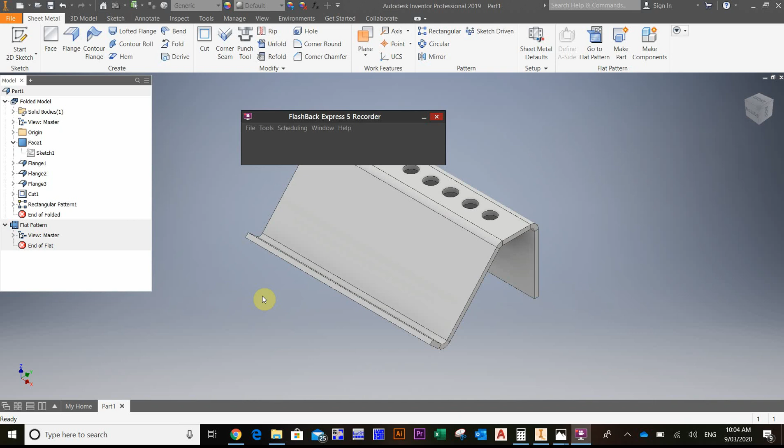Hey guys, I wanted to make a video on the Desk Tidy project that a lot of you are doing for Year 10 graphics. Simple video on how to use sheet metal and how I arrived at this very basic solution for the assignment.

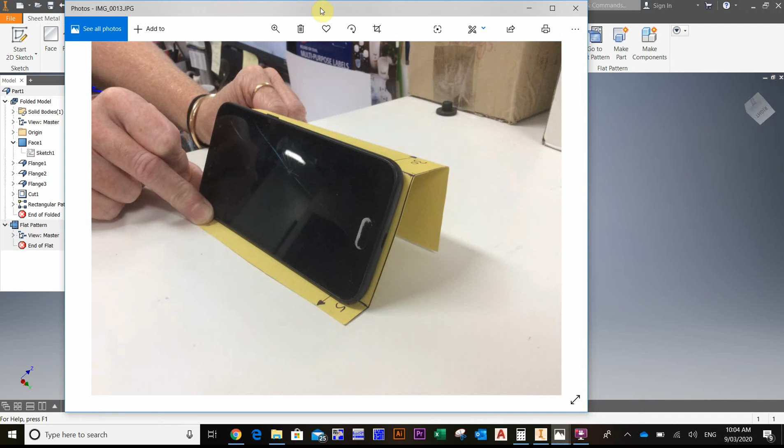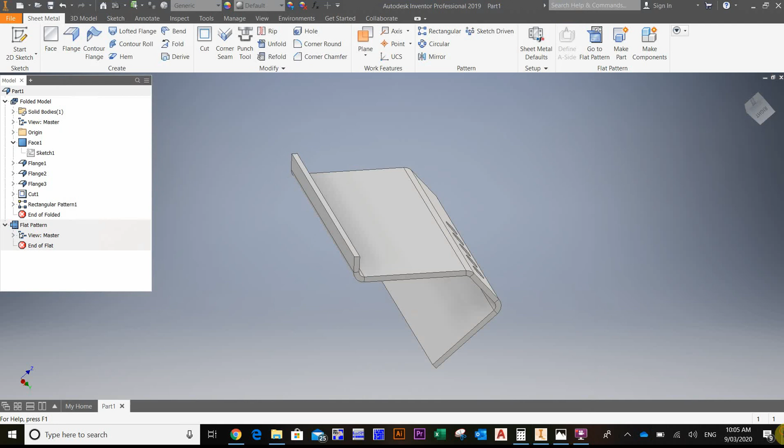What I'll do first is show you a couple of photos that I've taken. You would have worked with your teacher to develop your own cardboard model, so with that you get an idea of if it's going to hold your products and suit your needs. I'm not going to go into great detail about this, this is what your teacher will do with you in class. But what your teacher should have done is got you to draw on top of your development or your net, depending on how they're calling it, and figured out the distance between your fold lines, any angles for your folds, and a width for your sheet.

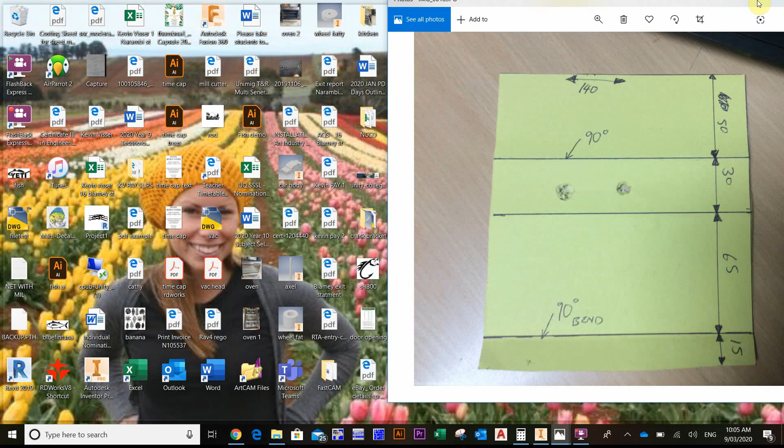We're going to be referring to this image quite a lot throughout the drawing of this, so I'm just going to keep it open here, and I'm going to minimize Inventor just so we can see both at the same time. I'll try something like that, see how that goes.

So what you're going to do is you're going to start a new sheet metal drawing. We want a metric sheet metal drawing, and I'm going to click on that.

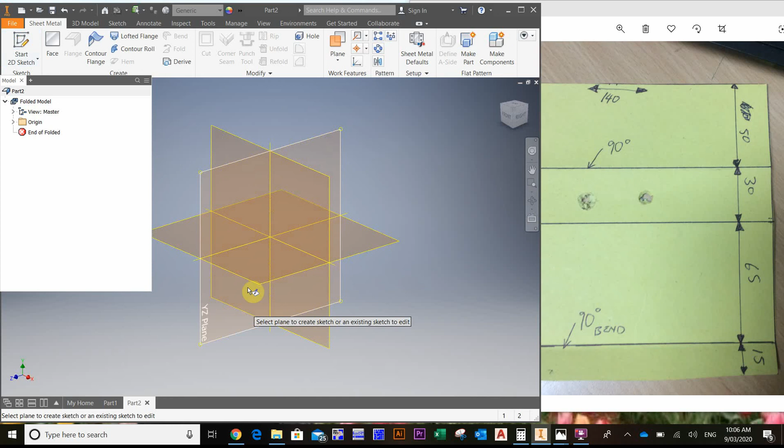Once that's loaded in, just like always, we're going to click the XZ plane there, and I'm going to start by drawing a rectangle. You'll notice with sheet metal it looks a little bit different. Okay, we've still got a sketch. The 3D part won't always work for you in sheet metal, it's a little bit different. We've got some different names for some of the things that we do. But the whole concept of having to do a sketch before you create a solid component is the same.

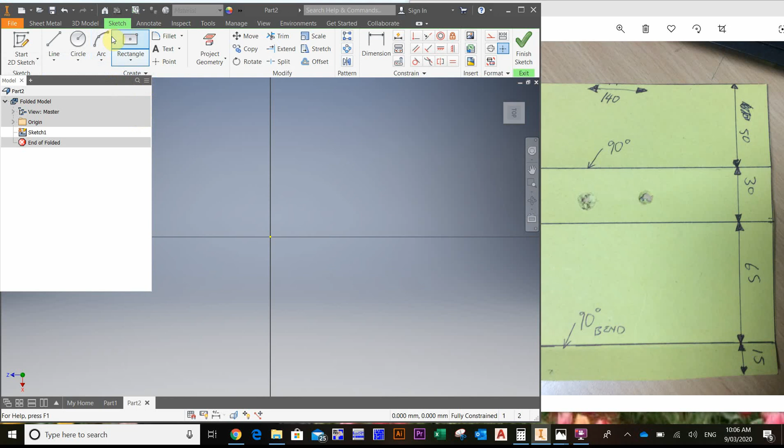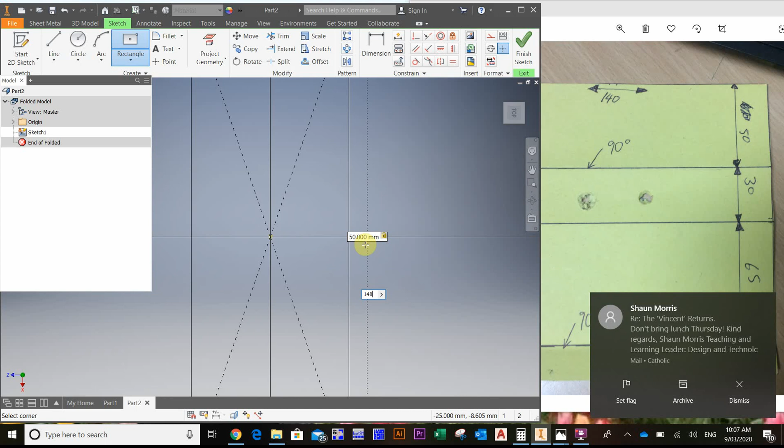So let's start off with a sketch, and I'm going to go to rectangle, and I want a 2-point center, and I'm going to select the center of my drawing like always, and I'm just going to draw this the same way that I'm viewing it over here. At the moment I've got a 140 wide by 50. We'll start with that one. So let's do a 50, and then I'm just pressing tab and 140, and I will press enter.

I'm going to zoom out. So there's my 50 by 140. I'm happy with that, and I'm going to go finish sketch. Sorry, 50 by 140, so I've just drawn that top rectangle there.

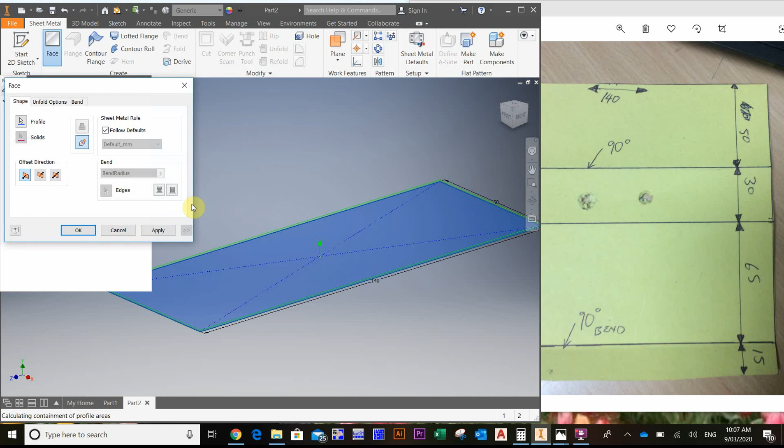The next thing I'm going to do is I'm going to press face. Now this is the equivalent of extrude, if you like, and I'm just going to click OK. What I don't know yet is how much that extruded, so I didn't get to put in any information there. I just was able to click face, I couldn't put in a value for the thickness.

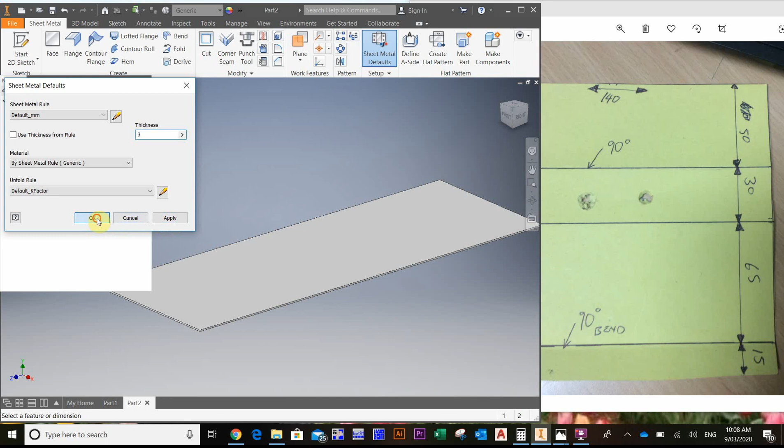But if I double click here on sheet metal defaults, I'm going to deselect use the thickness rule, and I'm just going to whack in 3mm because most of you are using 3mm acrylic, and I'll click OK. You'll notice that it's grown in thickness already, so it's grown to that 3mm in thickness.

So the next part that I'm going to do is I'm going to do a 90-degree bend, and I'm going to travel for 30mm. To do that I'm going to use the flange command. So I click on flange, I select that surface there, and I'm just going to put in my distance of 30mm that I'm getting from here, and there's my 90 degrees. Click OK, and that's done.

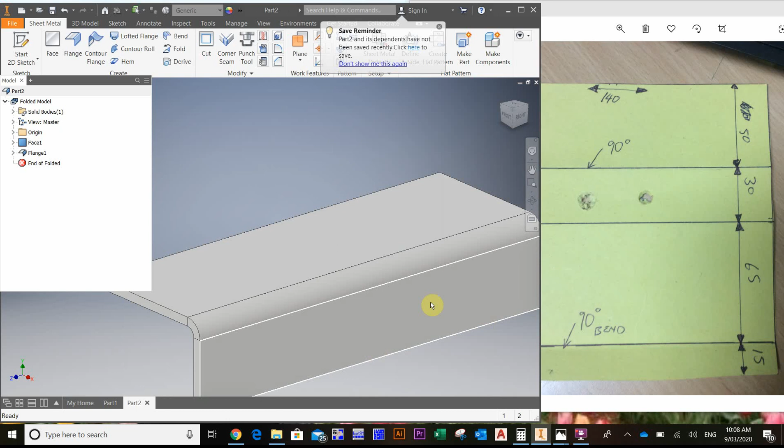So it's starting to take shape. If I take a look and we go back over here, I've just drawn this back panel and the top part there. We now need to come down this way, so I'll come back over to here.

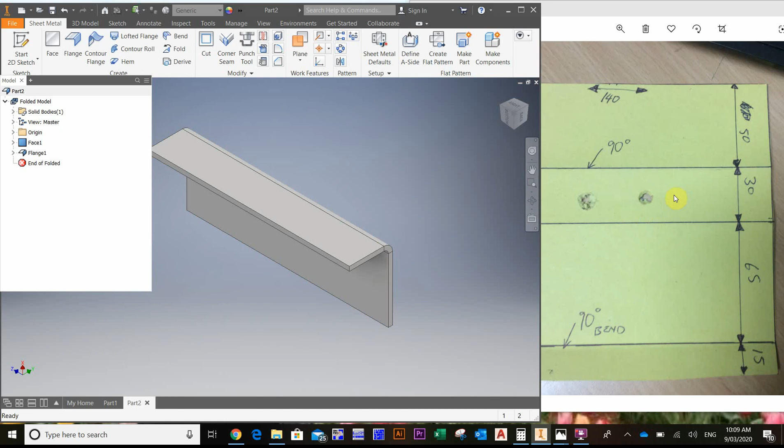So now we're going to travel for 65mm, and I wasn't too sure of that angle, though we did practice, so we'll have a look at how I arrived at that as well. Let's go flange, I'm going to select that surface. I want the distance, we know it's 65, it's the angle I'm unsure of. I put it next to a set square, and it looked pretty close to 45, so let's put in 45 degrees. At the moment it's a bit hard to tell whether that's sitting nice.

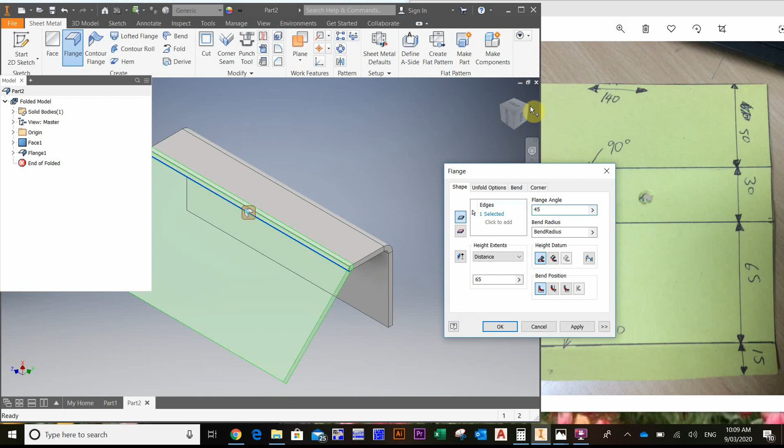So if I click on this surface here, I might even spin it around. And what I want is those two surfaces to line up so that this surface stays parallel with the desk if it was sitting on a desk.

Here's a little trick that I learned. I just zoomed out and I'm using, it's a bit crude and there's probably a better way, so someone can add comments and add to the learning of everyone if they figure it out. I'm just using this as a straight edge and I'm going to play with my degrees until both surfaces match.

So if I put in 50 degrees, it's going past, so I know it's between 45 and 50. So let's try 48. Oh, what do you know, it works. Okay, so 48 gives me that really nice bend there. So I'm going to click OK.

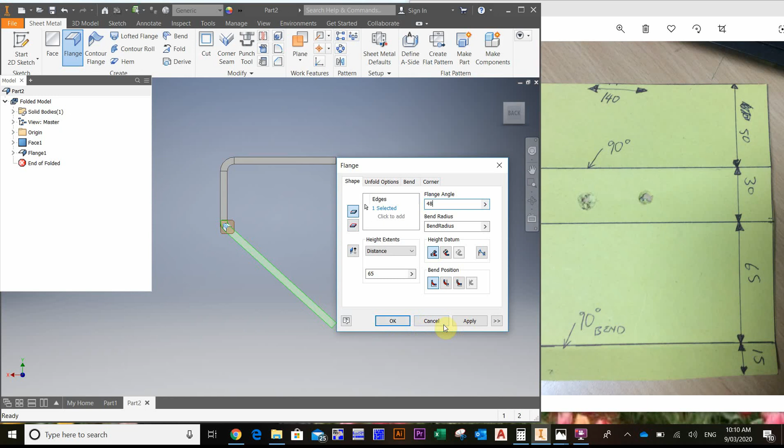Now what I'm going to do is I need to do another bend here. Shift middle mouse wheel to scroll around. So sorry, I'll use the correct terminology - flange, it's not a bend, it's a flange.

I'll select that one there and I know that this next one is 15, and I've already written on here at 90 degrees. So let's go 15 mil and my angle's going to be 90. Click OK.

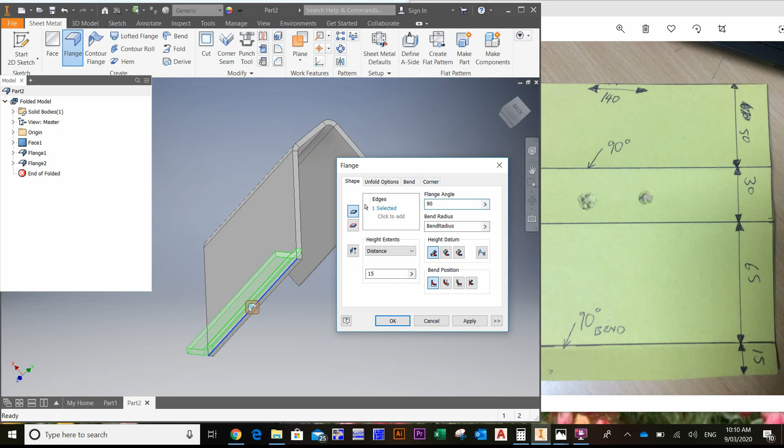And so that is now... ooh, not having much luck here with my isometric tool. Okay, so now it's starting to look pretty good.

If you wanted to put holes in it, you can draw a sketch and use the cut tool and put holes in it like that.

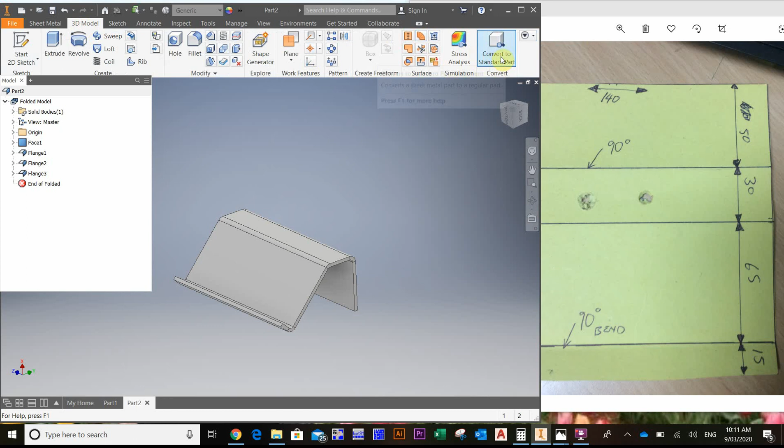If you're not liking the sheet metal layout, you can always do this. You can go to... I was going to convert it. Yep, here it is, convert to standard part. For some reason it was grayed out at the start. So I'm going to go convert to standard part.

I can now click on there and it behaves as if it was a standard part. I can then extrude and I can cut that and I click OK, and then I could do a pattern if I wanted of that feature.

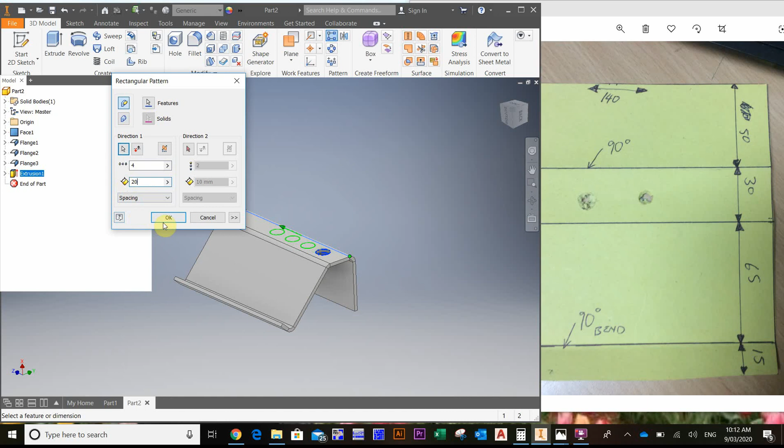Go in that direction. I'm not going to spend too much time or give too much detail here because it's not really the purpose of the video. So I'm just going to do this real rough for now. And so there's some pen holders. And that's how I would do that.

So I can flick back between sheet metal and standard part quite easily. And I quite like doing that because I like using the features of a sort of 3D model standard part to do my modelling, because let's face it, that's what I've done most of my time in and that's what I feel comfortable using. So I can put a radius on there if I wanted.

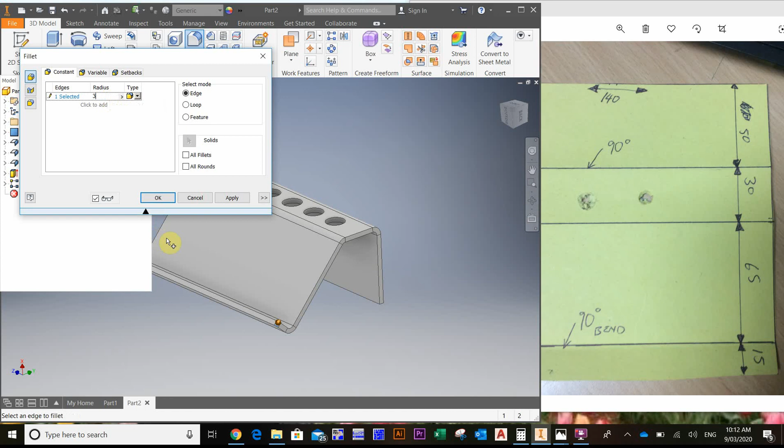And just start cleaning this thing up, making it look a little bit more pro, so it doesn't have sharp edges. Let's just say I've finished this and it's looking really good.

I'm going to convert it back to sheet metal now. And what I want is to be able to get a flat pattern to get a DXF for the laser. So I'm going to say create flat pattern.

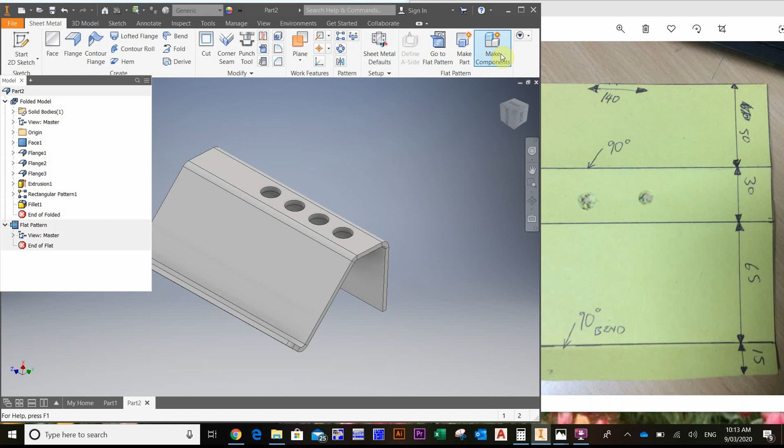And all that's done is it's created this drawing that I've got here essentially. And I can switch backwards and forwards between the two as much as I want. If for some reason it won't create a flat pattern for you, make sure you've given it a thickness in here. Sometimes that has caused me some grief.

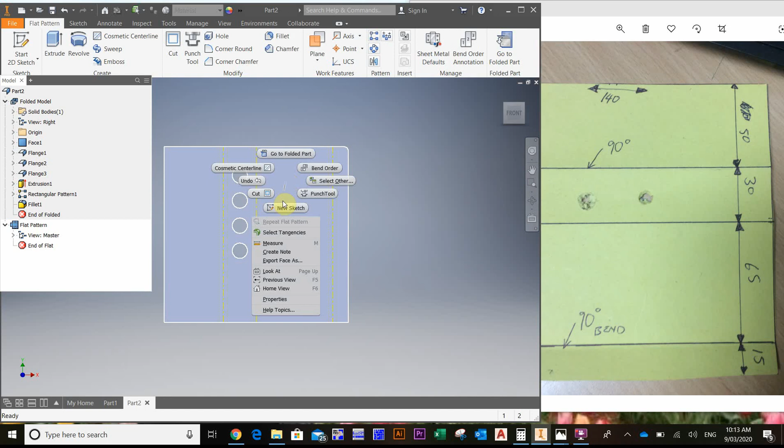But yeah, that's the easiest way, is just to go between folded part and flat pattern. I'm then going to select the surface. I'm going to right click on it and I'm going to export the face as, and then that's where I can just give it a name and save it as a DXF.

You can then take that DXF over to the laser. There's plenty of other videos where I've shown how to do that, and your teacher will show you how to do that as well. This is more a video on how to use the sheet metal component for your assignment.

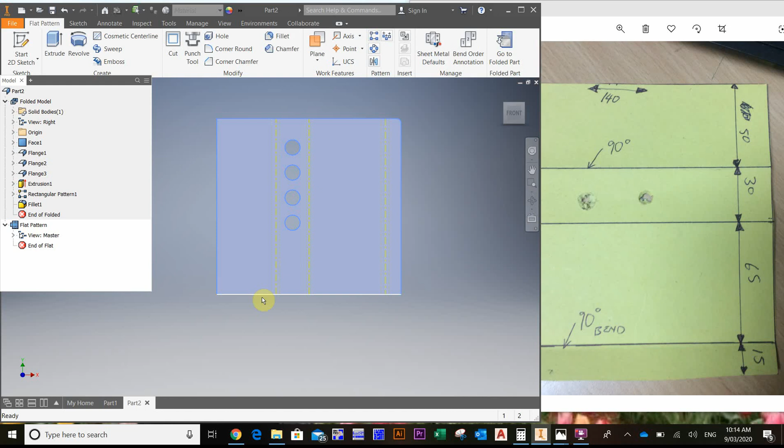Just to add to this, guys, there is a way to print your fold lines. However, I found that they were creating almost like stress fractures, and when students were bending the acrylic it was cracking on those lines if it wasn't hot enough. It's much easier just to have this plan in front of you, mark where your fold line's going to be with a whiteboard marker, and do your folds in the workshop using that.

Hope this video helps.